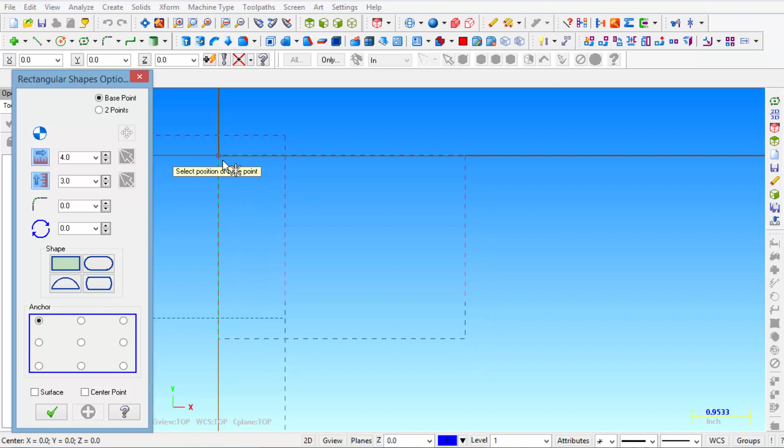Select yourself a color that you want to draw with, and then let's get started with our basic shape. So while holding the Alt key down and the center button, we're going to pan our crosshair to the upper left hand corner of the screen. Alright, then we're going to select create rectangular shapes, and we're going to enter 4 inches for the length and 3 inches for the width. We're not going to select the radius. The shape is going to be rectangular, and we're going to anchor to the top left corner of the rectangle, and then we're going to let it snap to our crosshair and left click and click OK.

Then we're going to right click. We're going to click on fit, right click again, and unzoom a couple of times, and now it should be nice and centered up on your screen. Okay, then hold your center button down and roll it to where you get somewhat of an isometric view. Okay, because we're going to translate this rectangle down 1 inch.

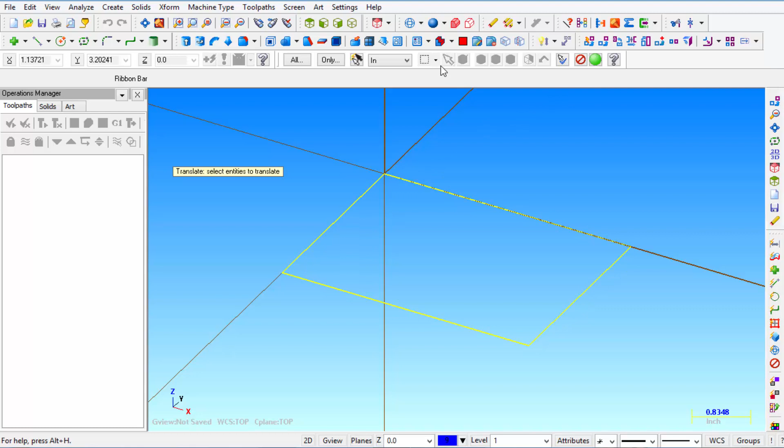Alright, so we're going to click on X-Form Translate. Then we're going to pull down this little menu here and select chain. We're just going to highlight one of those legs, and because we were set to chain, it will grab the whole rectangle, and then we'll select End Selection. Then we're going to join, and we're going to translate a -1 inch, and we're going to click OK. Now again, red is the original, the purple is the resulting color of your translation. So then we click on Clear Colors, and we're back to our system color.

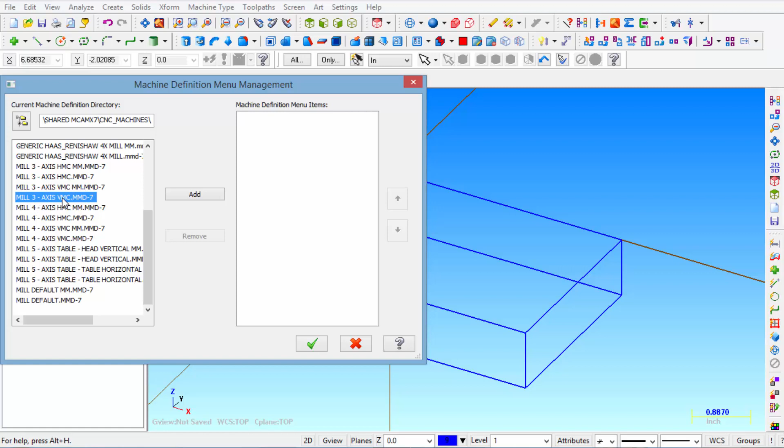Alright, so the next thing we're going to do is select a machine type. So from the menu here at the top, left click on machine type, then wand over mill, and instead of picking default, let's go to manage list. On the left side you should see a few of your mill post processors, and then let's select a file that we're going to use most often. In this case we're going to use a mill 3-axis vertical machining center, and we're going to click on add and then click OK. So now if we click on machine type, wand over mill, you can see that becomes one of our mills that we can grab real quick. So when you click on that, you can see right here in the toolpaths operation menu the machine group showing the 3-axis vertical machining center.

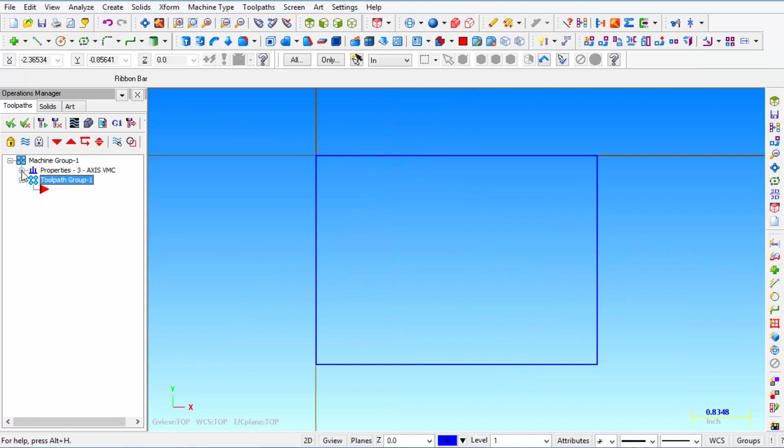Alright, so the next thing we're going to do is click on this icon that says top. So we're looking at the top view. Then in this operations manager, click on the plus sign next to properties, and then select the stock setup. Make sure that shape is set to rectangular. Put a check mark in display. Left click on bounding box. Make sure we have a check mark in stock and just click OK. So here you can see the basic dimensions of our rectangle. We have 3 inches in Y and 4 inches in X.

Now we're going to add stock to that. So we click in the box right next to 3. We enter plus 0.5. Enter. Now you can see that made it 3.5. So it added a 1/4 inch on each side of the Y. We're going to do the same thing with X. We're going to say plus 0.5. Enter. So it makes it 4.5.

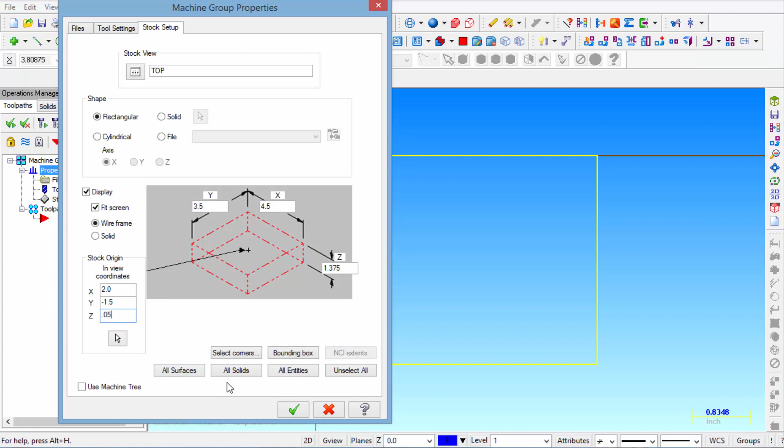Now, even though our part is 1 inch thick, we're going to start out with 1.375 inch stock, so that we have almost 3/8 of an inch to hold on to. Okay. Then right here where it says stock origin, in the Z, we're going to shift the stock up 50 thousandths because that is the excess material we're going to be taking off with our facing operation.

Then we click OK. So you can see the stock outlined around your part. You can see that it automatically adjusted the excess material evenly all around the part. So again, if we rotate our part, you can see we have our 1 inch thick part in our 1

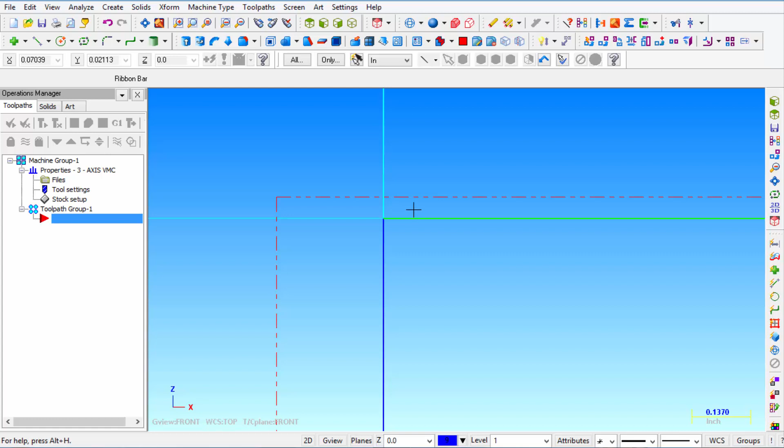3/8 thick stock. Okay. Now, if I click on front view and I zoom in, you can also see that I shifted 50 thousandths so that we actually have stock on top of the part that we want to be facing off. So back to isometric view, right click, fit, and then roll your center button out and you're back to where the part is in the middle of your screen.

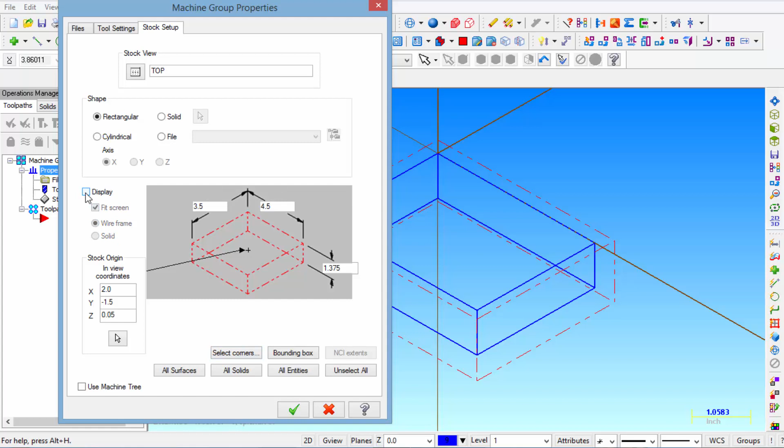Alright, so now to turn off that raw material, you left click on the stock setup and you take the check mark out of display and then click OK, and now it is gone. Or you can change it from wireframe to solid. Okay, and click OK, and it gives you a transparent view of the raw material.

Alright, so for now we're going to go back to stock setup, wireframe, and being able to see the raw material will help us as we're creating our toolpaths to make sure that our approach of our tool is not going to crash into the solid material.

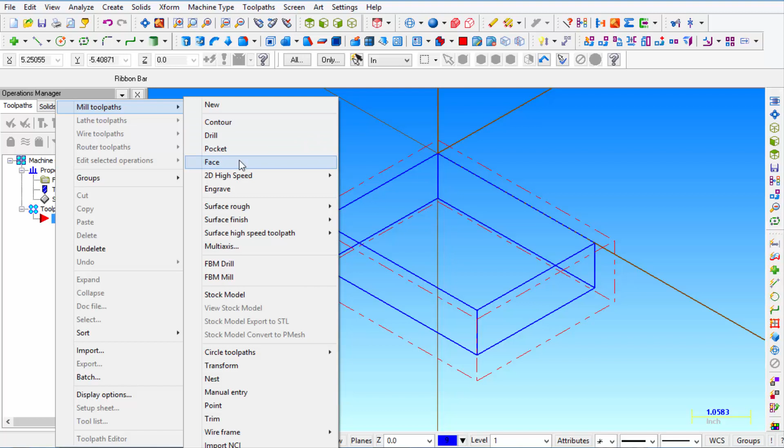Alright, so the first thing we're going to do is face the top. So we're going to right click next to this red arrow, I'm going to wand over Mill Toolpaths and then select Face. Then go ahead and enter a name or just click OK. Then it says here select OK to use defined stock or select the chain.

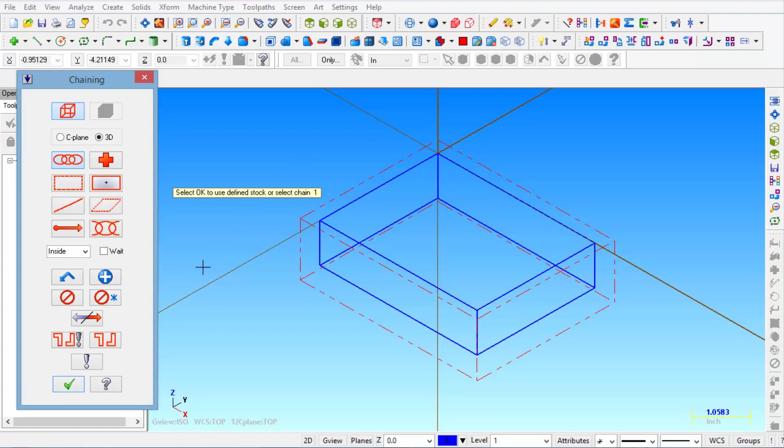Now we can either select the chain at the top of our part or just let the system look at the stock that we created and let it do the work for you. So we just click OK. Then click on Tool, select the Library tool. It should automatically show you all the face mills.

If it doesn't, click on Filter, make sure that face mill is highlighted, and then click OK and you should see this. Then select 2-inch face mill, click OK. Now that is tool number 316, so we're going to edit. So right click, edit, and then we're going to make that tool number 1.

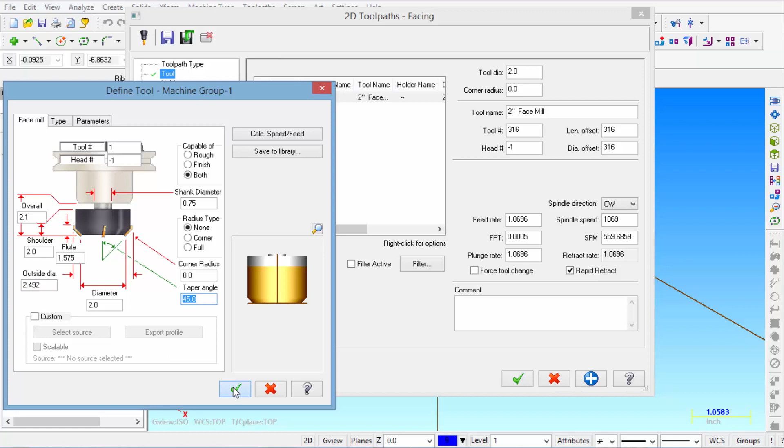Now notice the diameter says 2 inches and the taper angle should say 45 degrees. Go ahead and let all these other numbers default out and we'll click OK. Alright, so at the top it says tool diameter 2 inch, corner radius 0, tool name 2-inch face mill, and then tool number 1. Then we're going to manually enter the surface feet per minute and we're going to put that at 500. Click enter.

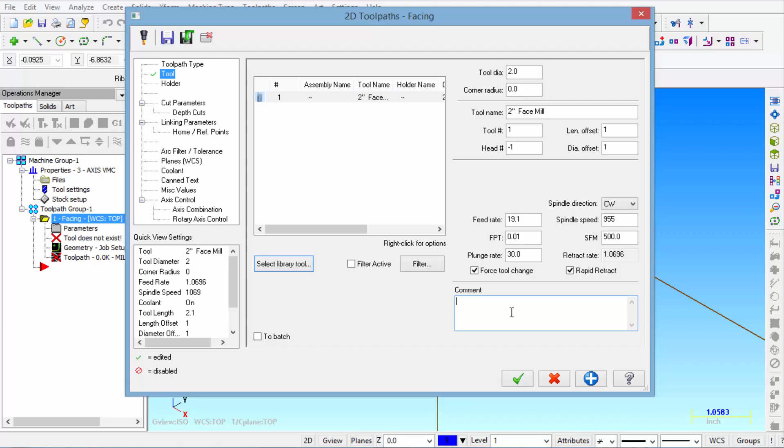Then feed per tooth is going to be 10 thousandths. Hit enter. That puts us at 19.1 inches per minute. And the plunge feed rate, that is the feed rate that the tool will come down with, is going to be 30 inches a minute. Then we'll put a check mark in force tool change, and in the comment section we're just going to enter face. Then from the cut parameters, the style is going to be one way.

Now you have a pull down menu, you can zigzag, one pass, and dynamic. We're going to select one way. Make sure tip comp is at the top. Roll cutter around corners, set to sharp, it's okay. And under stock to leave on floors, make sure you make that a 0.

Now over here at cross overlap, that is how much the tool will overlap the side of the part as it's going across. Then the along overlap is 2.2, approach distance is 1 inch, exit distance is 1 inch. Now these are all numbers that the system has determined based on the size of the tool and the stock size, and so all these numbers should work out.

The max step over is set at 1.5, so we have about a ½ inch overlap between passes. We're going to climb cut and we're going to reverse the direction of the last pass. Now we're not going to do anything about auto angle. We're going to go ahead and click OK and see what the toolpaths look like.

So click on backplot selected operations. So make sure there's a check mark right here on the folder that we created, and then left click on backplot. We zoom out just a little bit, rolling your center button, and then set your speed to about midway and click on play.

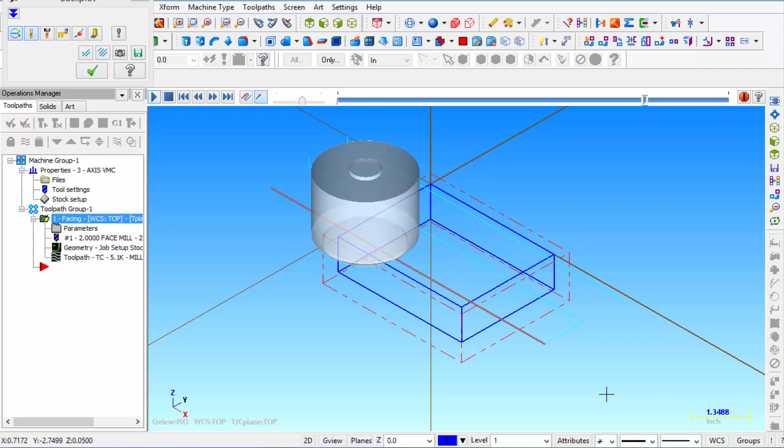So you can see it's got about a 1/2 inch overlap right here on the far side. Then it comes across, it jumps back up, goes back to the other side, and that is because we picked a one way, and then on the last pass it reverses direction, so it doesn't pick back up and goes to the other side, it reverses direction.

So you're always climb cutting when you're overlapping an edge, and that pushes the burr to the inside of the material. So you can see 3 passes to face off the 3-inch width, which is actually 3.5 inches because of the excess stock that we have.

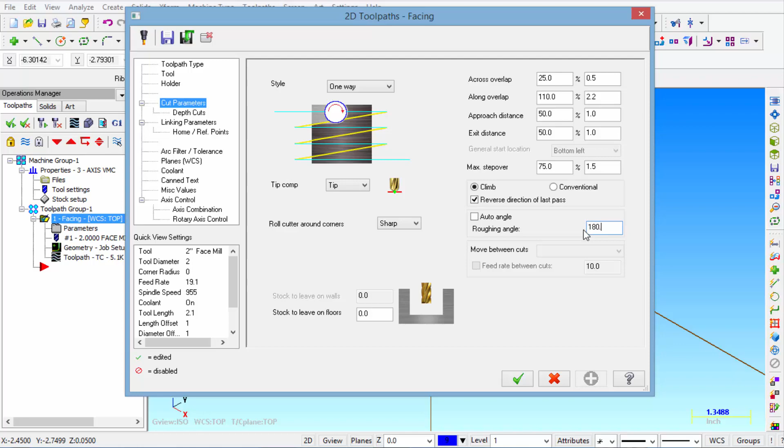Alright, now if you would prefer to start on this side and work from front to rear, then the way to make that change is go ahead and click OK to get out of simulation. Left click on parameters, and where it says auto angle, the roughing angle is set at 0, so go ahead and put 180 degrees. Then click OK.

Now you can see there's a red mark on the toolpaths, so we need to click on this button that says regenerate all dirty operations. This operation is now dirty because we made a change. So click on that, make sure that red X is gone. You can see the preview of our new toolpaths, backplot, and play.

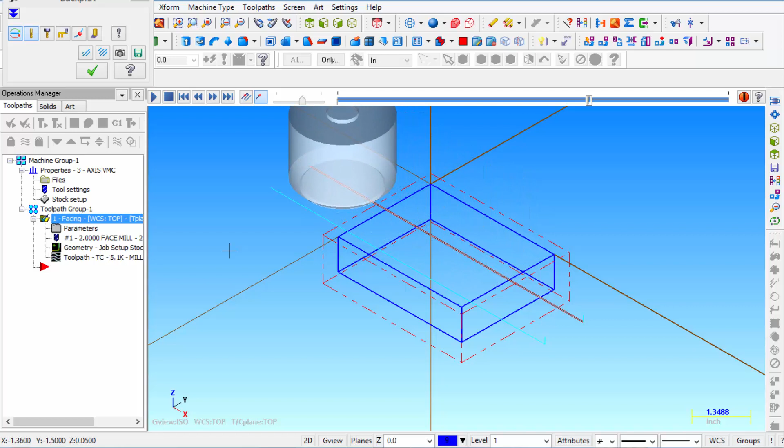So now you can see it starts on the front side, makes one pass on the front, jumps up, comes back, comes across again, and then reverses direction on the last pass to make sure that we're always climb cutting and pushing the burr to the inside of the part instead of off the edge. Alright, so that takes care of facing. So let's click OK.

Alright, next we're going to mill the outside. So we're going to click on the icon to set our construction plane to top. We're going to zoom in and we're going to right click next to the red arrow. We're going to wand over Mill Toolpaths, Contour, and we're going to click right here on Partial and then put a check mark in Wait.

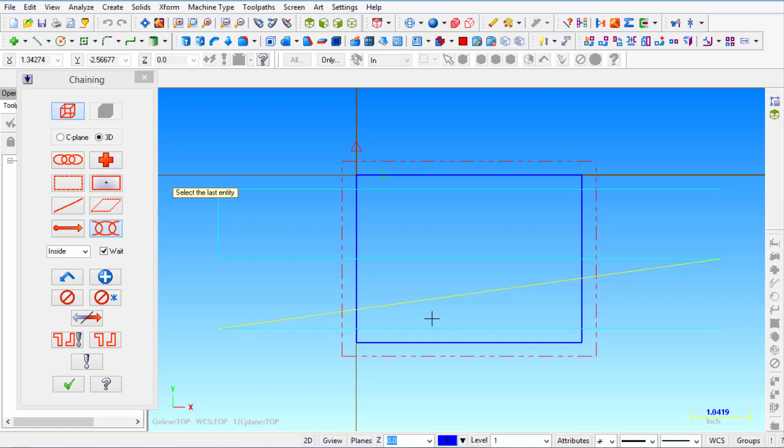Now we're going to walk around this part in a clockwise motion, so we're going to be climb milling around this part. The first leg we want to do is this top leg right here, then this right one, bottom one, and the left one. So once we've got them all highlighted, we click OK, and then this menu opens.

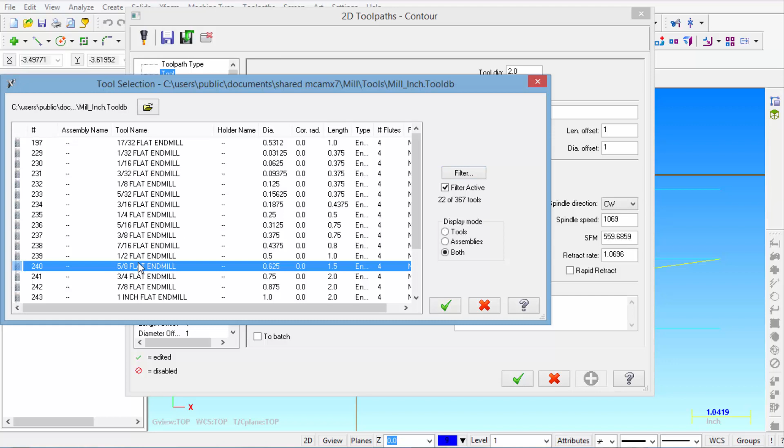Toolpath type is Contour. Tool, we're going to have to select a new tool, so we're going to click on Select Library Tool. It should automatically come up with standard end mills, and if not, click on Filter. Make sure that end mill flat is highlighted, and we can turn these off. Click OK, and then all you should see is flat end mills. Then we're going to pick a 5/8 flat end mill, and we're going to click OK.

We're going to right click on that tool and click on Edit. We're going to make that tool number 2. Then click on Parameters. We're going to feed at 20 inches a minute, plunge at 50, and retract 100. And the spindle speed we're going to put at 1500. Then we'll click on Coolant. We'll pull down this menu and click it to On. And click the OK button. And go ahead and click this to Carbide. And then we'll click OK.

Alright, so you can see we have a tool diameter of 0.625, 0 on the corner radius. The tool name is 5/8 flat end mill, and we got tool number 2 with length offset 2 and diameter offset 2. Alright, then our feed rate is set at 20 inches a minute. Feed per tooth is roughly 3 thousandths and 3/10ths. Our plunge rate is 50 inches a minute.

We got a clockwise spindle direction, which should post out an M3, a spindle speed of 1500 RPM, which is roughly 245 surface feet per minute, and then a retract rate of 100 inches per minute. Now we're going to put a check mark in force tool change and also in rapid retract. That way we're not feeding when we're retracting, but we're rapiding when we're retracting. And then we're going to type in rough outside. Alright, so that takes care of the tool page.

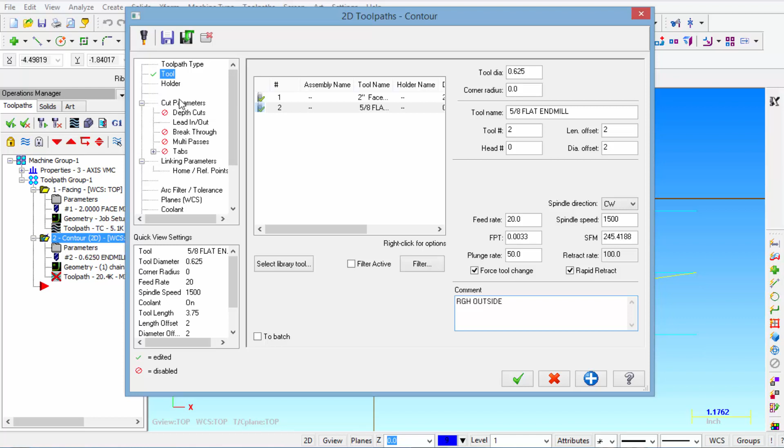Then the next thing I want to do is go to cut parameters. We're going to set compensation type to computer. You can see the options we have. We'll let it default on computer. Compensation direction left, we're going to do climb left, and tip compensation set to tip. Roll cutter around corners, we're going to set that to none, and stock to leave on walls, let's put in 20 thousandths. Contour type set to 2D, and that takes care of this tab.

Then the only other thing I want to do right now is go to linking parameters, make sure that everything is set to absolute, no check mark in the top, the retract set at 1/4 inch, feed plane to 100 thousandths, top of stock is set at 0, and the depth is going to be -1 inch.

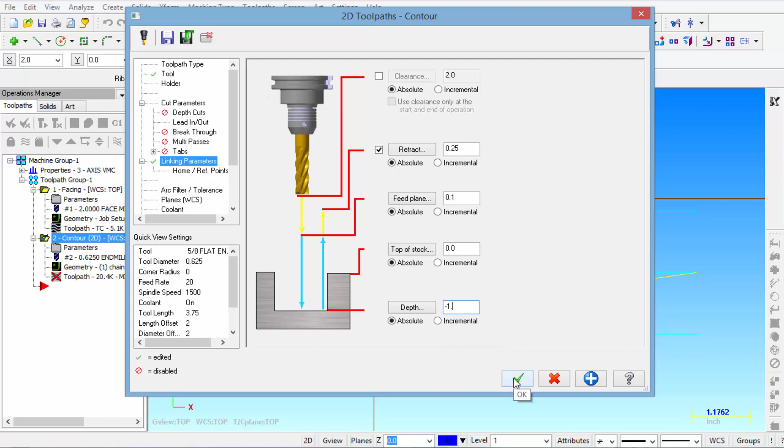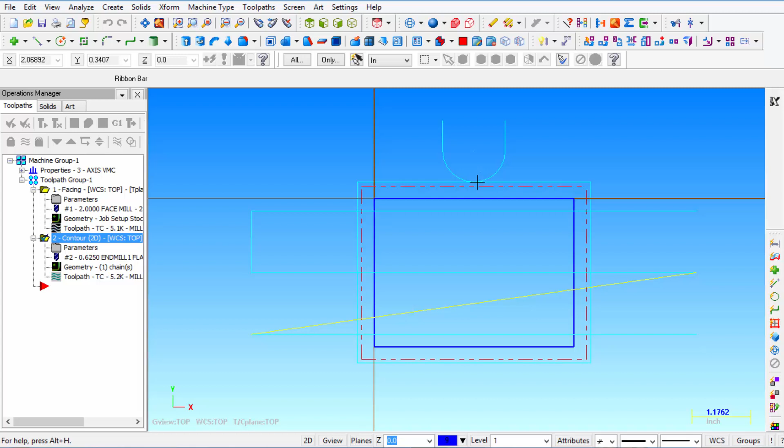Now at this point, let's click OK, and let's do a simulation. Now notice we have a red X in our box, so we're going to have to click on Regenerate All Dirty Operations. Alright, so now look here. This is the tool path, and you can see the lead in. You got a straight and then an arc in. It walks around the part and then it arcs out, and it does that in the middle of the part.

So let's watch that tool path. You see it arcs in, it makes a sharp turn, walks all the way around, and then arcs out in the middle. So now what's going to happen in the middle of your part, you're going to have a lead in and a lead out, and that usually shows up as a little ding in the middle of the part.

So let's fix that first. Click OK, then left click back on parameters, and then left click on lead in, lead out. So the first thing we're going to do is unclick where it says enter and exit at midpoint in closed contours. So if you do that, click OK, regenerate dirty operations, and now you can see it moved it from the middle to the end of the part.

So let's watch our graphics. You can see it arcs in like that, walks all the way around, and arcs back out. Okay, now click OK. We're going to change that just a little bit more. Now right here where it says entry, you have a perpendicular and a tangent option, and we're going to go ahead and leave it at tangent.

Then it looks at the diameter of the tool and it automatically puts that 625 thousandths in it. Now we're going to leave that alone. Now here where it says arc, we're going to go ahead and make that 0. And then notice in the middle we have this double arrow. We're going to click on that, and what it's basically going to do is copy our numbers from left to right. And these are the values for the exit. So at this point we click OK.

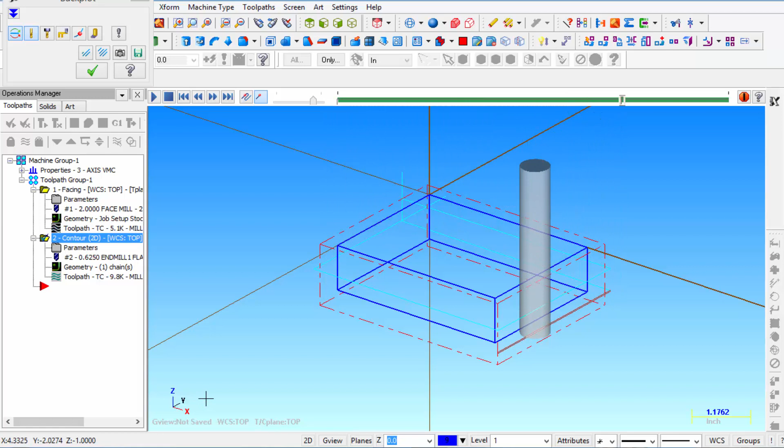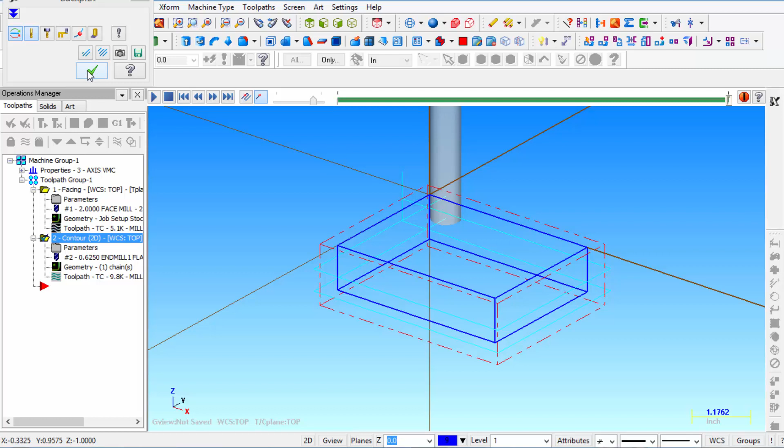So now the first pass, you can see right here in the bottom left hand corner we are at -0.5, and then it takes a second pass at -1 inch. So now we have broken up those two passes to make it a little bit easier on the cutter. Alright, so the next thing we're going to do, instead of taking the full width of the excess material, which the end mill could probably handle, let's say that you wanted to break up that excess stock, create multiple passes on top of depth of cuts. So click OK.

Again, click on parameters, click on multipasses, make it active by putting a check mark in there. And then we're going to make 2 rough passes, and we're going to do 150 thousandths per pass. So just by doing that, we're going to click OK. We're going to regenerate. And now I'm going to go back to the top view, backplot. Alright, let's click play. You can see it stays away 150 thousandths on our first half-inch depth cut. Then at half-inch depth cut it goes all the way to our 20 thousandths plus.

Then it goes to full depth, stays away 150 thousandths from our 20 thousandths excess, and then to full depth all the way to 20 thousandths excess. So if we roll our model, you can see it not only takes 2 passes on the depth, but it also takes 2 passes on the outside. So that's how you control those features.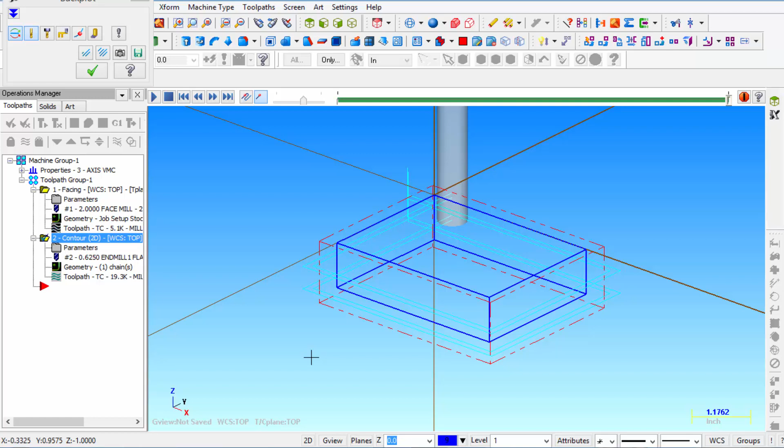Alright, so then let's add a finish pass. Let's click OK on backplot. Now, right here, the folder that is highlighted for the rough outside operation, let's right click and hold your right mouse button down. Then drag it next to the red arrow and let go of that right mouse button. Then we're going to copy after. So now it copied that operation, and then we'll go ahead and move our cursor down to the bottom. You can see you can manage that cursor just by hitting these buttons right here. Okay? So now this is an exact copy of what we just did.

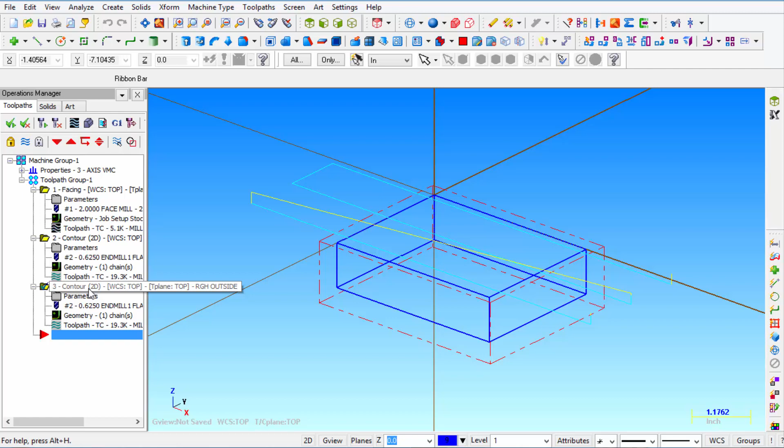So we can change that by going into the parameters, and we're going to click on Tool. We're going to right click in this window and we're going to click Tool Manager. Then we're going to select tool number 2, right click and click Copy Tool. Then right click again and we're going to paste the tool. Then it will give you a warning. It's saying a similar tool, tool number 2, already exists in the tool list. Do you want to add another? We click Yes. Then on the tool that doesn't have a check mark next to it, we're going to select it, right click and edit.

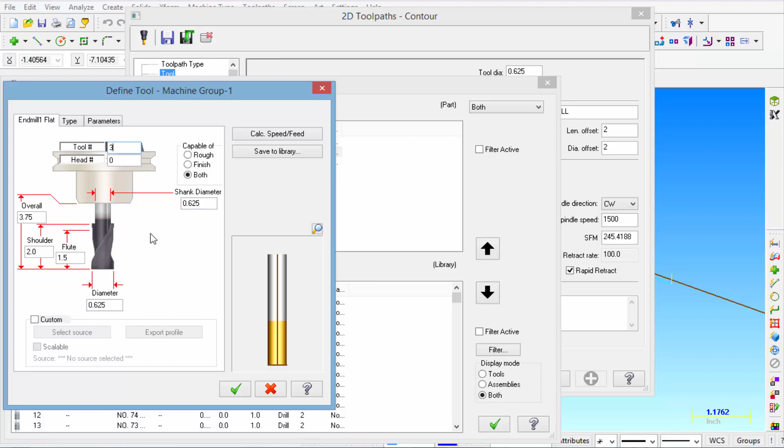And we're going to make that tool number 3, which is going to be our finishing tool. Then click on parameters, and right next to tool name, we type FIN for finish. And we click OK. So now we have a 3rd tool in our library. So we click OK. So you can see tool diameter 0.625, 0 corner radius, and that's a finish 5/8 flat end mill. And that's tool number 3 with length offset 3 and diameter 3. The feeds and speeds I'm going to keep the same. Comment I'm going to of course change to finish outside instead of rough outside.

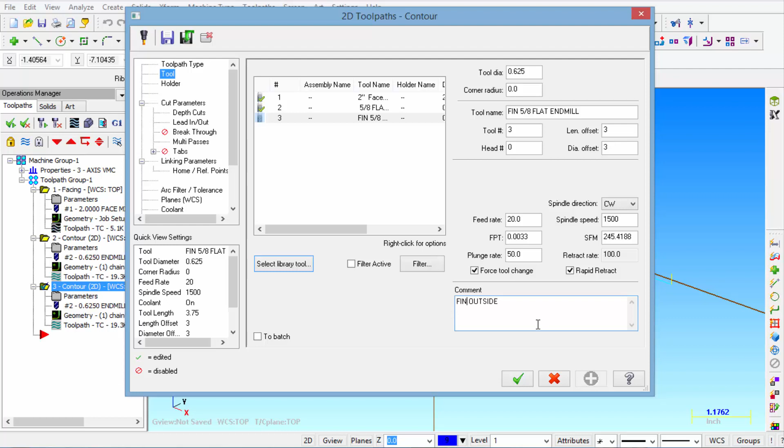Alright, so cut parameters we're going to change to wear. We leave everything else the same except for stock to leave on the walls. We're now going to change to 0. Now on depth cuts we're going to deselect depth cuts, and also multipasses we're going to deselect because we're going right to full depth for our finish pass.

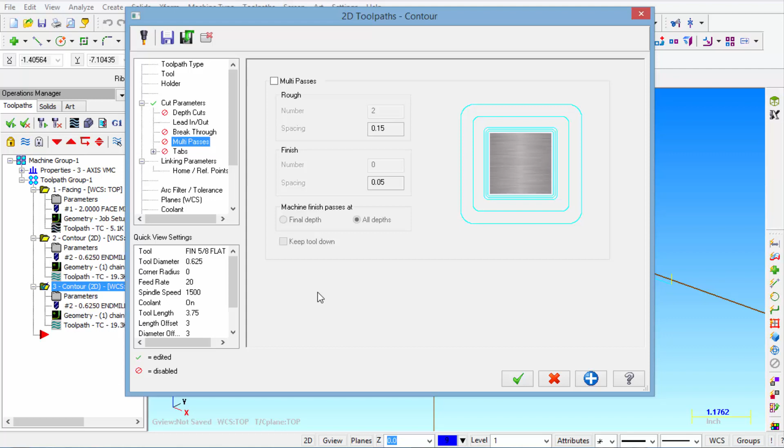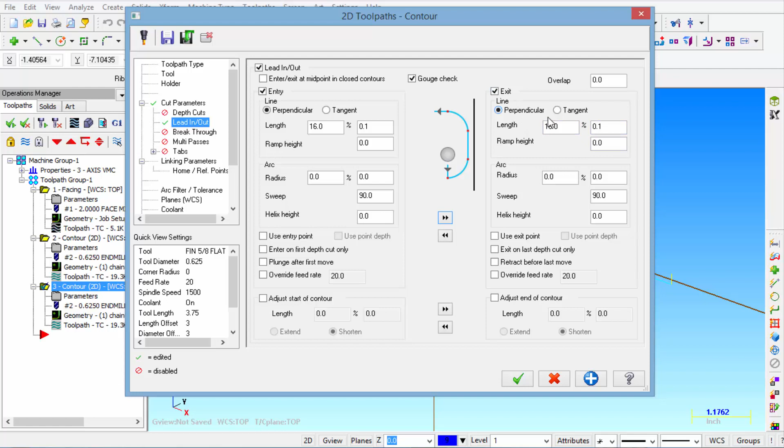So the only thing we need to change now is the lead in and lead out. On the rough pass we approached our part tangent, but on a finish pass we want to approach our part perpendicular. And instead of 625 we're just going to do 100 thousandths. Then again we click on the double arrows and we're going to duplicate that to the other side. It's going to also exit doing a perpendicular pass 100 thousandths away from the part. So let's click OK, regenerate all dirty operations, and let's watch our backplot.

Let's click play. It makes a perpendicular move, and in the program it will activate a G41 line left cutter compensation. Then it walks all the way around the part at full depth, goes beyond the part, and then makes a perpendicular move away from the part, and at that point the program will actually post out a G40 canceling the line left cutter comp.

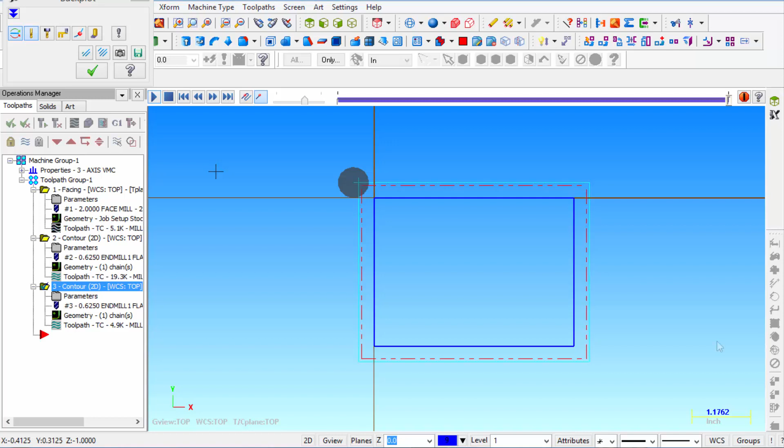Alright, so at this point you are ready to post out your program. So let's click OK on the backplot and make sure you click on this button that says select all operations. We want to make sure that all these little folders have a check mark before clicking on G1. And G1 means we're going to post the selected operations.

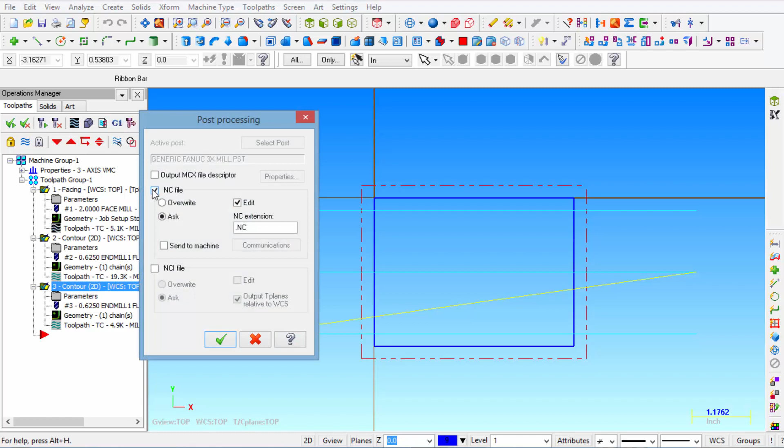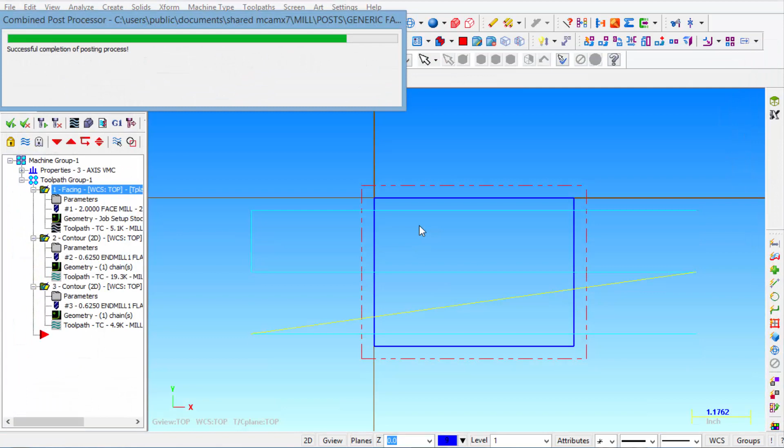Now when the post processing window comes up, make sure you have a check in the NC file and a check in the edit, and that it says ask and not overwrite, because when you click OK you can actually name the file, and in this case we call it milling. If I hit save and the file already exists, you have the opportunity to say no. So in this case we'll say yes, and then it will go ahead and post out your program.

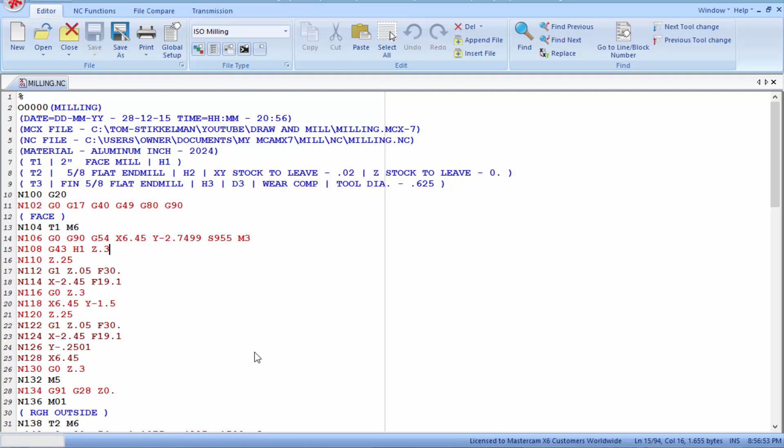So here's our program. I'm not going to go into the details of it, but you can see at the top of the program it's called milling. It has a date, it has tool number 1, 2 and 3, and then we have facing, rough outside, finish outside, and then an M30 for the end of the program. Alright, so that's a lot of information on controlling toolpaths even on a simple piece of geometry like this.